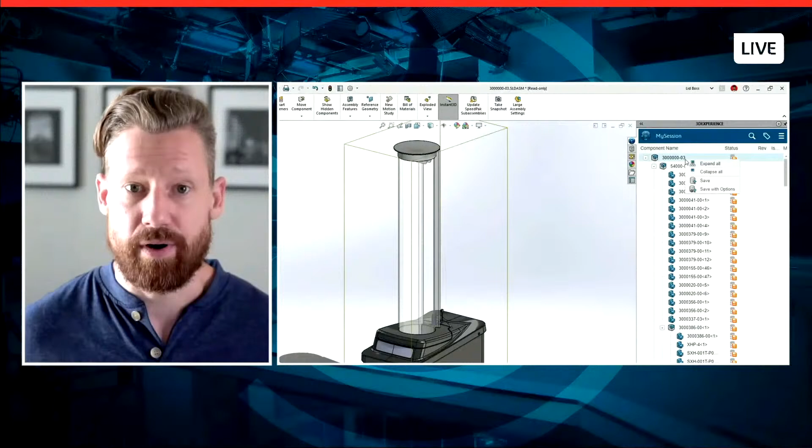And as you've already seen this week, and probably know yourself, that's what Titans of CNC is all about too. That's really the foundation of what makes our partnership so special. A shared desire to innovate and push the boundaries through our respective capabilities, which inevitably empower our communities.

So we kicked off this Titan Trifecta streaming series two days ago with Manufacturing Live, where we got to hear from Barry, Jesse, Trevor, and Travis with our own John Milbury. They explored a wide variety of manufacturing topics for the future, which stemmed from their own personal insights.

And then, of course, yesterday, Barry and I hung out as we explored his tried and true methods for making aerospace parts inside of Solidworks, sharing tons of personal insights that I hope made, or will make if you watch it later, you feel like the luckiest fly on the wall.

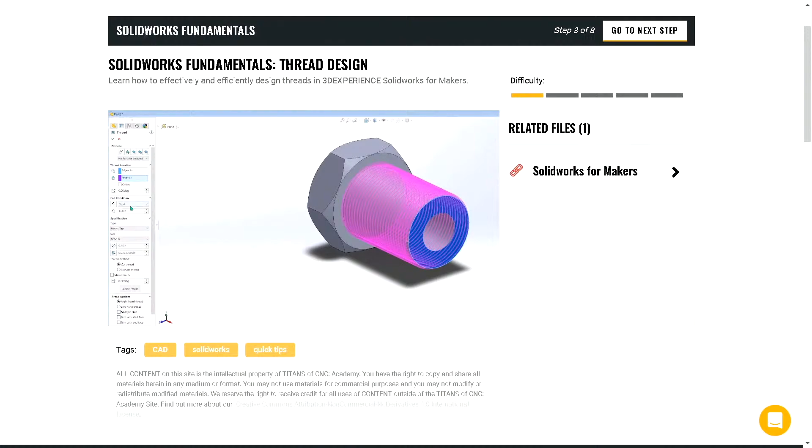So without further ado, let's catch up with the guy that I've gotten to know pretty well over the past few years here at Titans of CNC, Dave Cox, as we explore our partnership and its history in greater detail. Let's get to it.

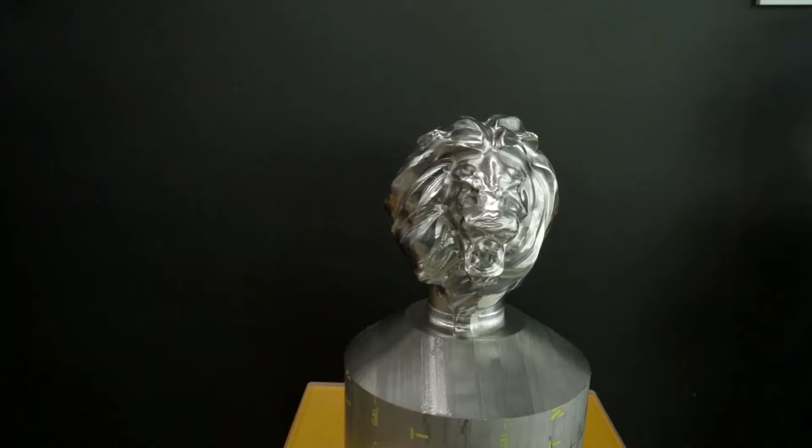So here we are. We're here on Solidworks Live. We are at Titans of CNC, and I'm joined by Dave Cox. Dave, how's it going, man? Doing good, doing good. Good to see you. Happy to have you guys here. It's amazing you get to come to Mecca and see what's going on here.

Yeah, and I've talked to you so many times over the years. It's just cool to meet in person, be here, feel the energy. We've been paying a lot of attention to this lion here.

What's this story all about? So the lion, the chessboard, all of these kind of more artsy pieces that you see - these are ways that we actually use to draw people into the industry. So we're doing projects like this. We call this a part. This is an art part.

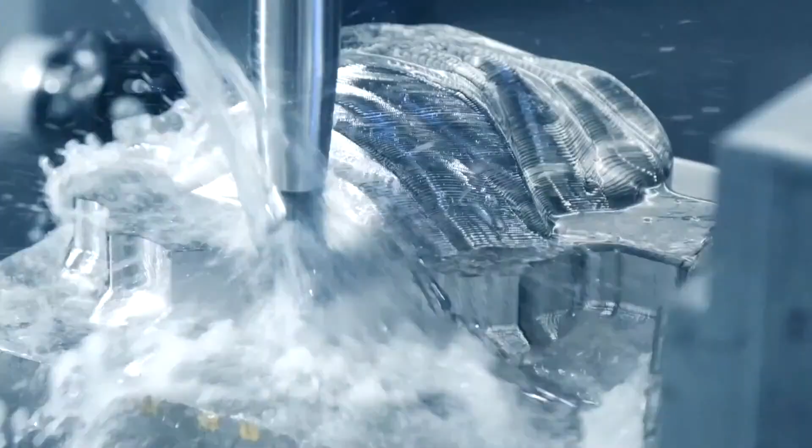Basically, we're showing people that this metal stock turns into this amazing lion head. And by doing that, we're trying to draw people in. We're showing them the breadth of what's capable with this part manufacturing, not even just from a design standpoint, but people don't really understand what goes into this until they see a video that really highlights it.

So how are you gonna first off get it so smooth and get all these different lines going crazy? How are you gonna find a tool that gets back in here behind the teeth without breaking the teeth? That was the first thing I told you before I saw any of the videos online. I'm sure you guys are wondering, like, what is this? That was the first thing I noticed. It was the teeth. It's like, how do you get a tool in there and not chip off the teeth?

Exactly. Especially, you know, in the finishing rounds, right? So you have this really expensive piece of titanium, 6AL-4V titanium, that number one is heavy as heck. So this giant cylinder of it, and the material's super expensive. So by the time you get in here and you're finishing, you could ruin this part very easily just by nicking one of these teeth, by breaking something off.

And so it's really teaching you that mentality of what tools do you choose, what are the feeds and speeds, what kind of chip evacuation do you need to not screw yourself up, and also how do you hold it? Yeah, how do you hold it?

It's important, this thing is heavy. It's insane, it's titanium, and I like how you guys kept it. Yeah, you can see it's titanium here. It's very heavy, I know you can't pick it up at home, but yeah, it's very heavy.

I want to say our fixture on it has over 100,000 pounds of clamping force to hold this, because if you think of it, and you've seen the video, this thing is moving around in real 5-axis space and it's just insane.

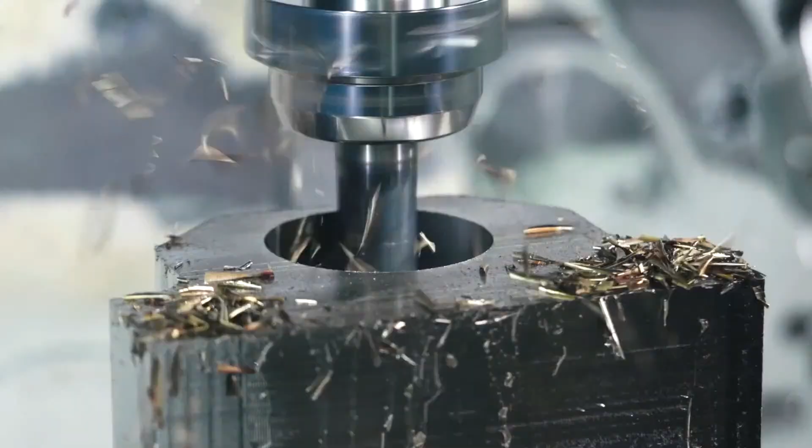That's right. In manufacturing, there are so many personal stories with how people get involved, like we heard from the guys on the panel on the first day. How somebody gets involved in manufacturing plays a lot into how they're going to solve those problems within manufacturing. All they really need is to understand the tools. Once you relate it to baking, once you understand how an oven works, how the pans work, how heat and flour and salt work, all the different pieces, then you just need the recipe, and you can start to get creative with that recipe. So what we're really doing is teaching the fundamentals, and we're also teaching very advanced manufacturing.

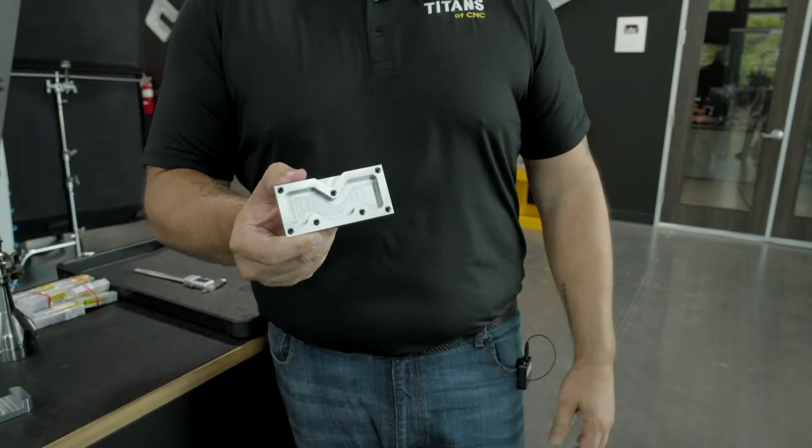So some of our parts, if you want to come in a little tighter, that'd be cool. So teaching people from building block number 1, Titan 1M, right, the famous little part that we have. It teaches people how to make a block, how to do holes, thread, face mill, do pockets, all of that kind of stuff. This is the first piece they're going to create in the Titans of CNC building blocks.

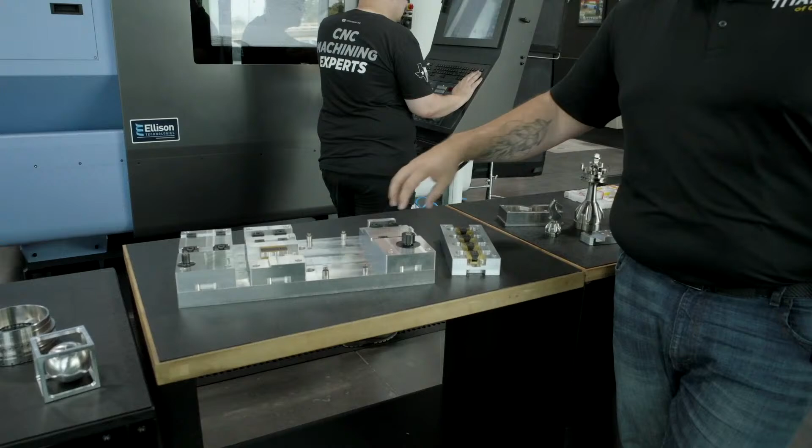Going from this into other elements, learning live tooling on a lathe, learning different lathe work. We talk about how we hold parts and fixturing, and how you set up a piece of work, a fixture plate that can then hold multiple parts so that you can be more productive with what you're creating. All of this is curriculum as well, walking people through exactly how to do it.

So what we look at these academies as is a starting place. The building blocks with 10 parts that you create on a mill, the rocket series with 10 parts that you create on a lathe, and then our fixturing series are kind of the foundation. You look around, being here, you kind of have that fanboy moment, right? It's like, I've watched you guys for years, even before we had ever met.

Seeing your shop here, your big production facility on YouTube and all your different outlets, it's super cool. You see the power of your partnerships, not just us, but Doosan, Kennametal, all the others. We've been partners now, I'm sure a lot of you from the Solidworks community know this, and Titans of CNC community as well. We've been partners now for, it's crazy to believe it, a few years already.

What was it really, if you think way back, what was it really about Solidworks that you were like, I definitely want to partner with those guys? Yeah, it's an easy decision, to be honest. You guys make it super easy, which is great, right? It's Solidworks, a leader in the industry, obviously. One of the easiest to use softwares, the most ubiquitous in part creation, in design.

That's why I fell in love with it before I worked here. Right, exactly. It's the same reason people use Photoshop for creative design, and they use these different signature programs that are there. With Solidworks too, it's what the industry is using. That's where we want to be teaching. We don't want to come from the far side and say, hey, here's something you've never heard of that you should probably start thinking about. We want to go, hey, these are the leaders in the industry. You can get a job literally anywhere. If you understand Solidworks, if you know it, you're immediately employable across the country, across the globe, making more than 30 bucks an hour, like to start. You understand it, you're really good to go.

So Solidworks, number one, super easy to use, excellent interface, all those things. And that's kind of been the ethos of the entire company. That's why all of our partners exist. We have to believe in the product. We have to believe in what you guys are doing. And honestly, it's the people behind the product as well.

Throughout this experience and our other chats, seeing your passion for the industry and seeing your passion for design and what Solidworks is doing, and honestly how much you guys love Barry and feed into him. The dude's a monster when it comes to design, right? Oh my God, it's really cool to get into a room, and I think other people in manufacturing and design, anytime you're in that niche and you have a passion for it, meeting other people that share that passion, you immediately hit it off.

And you can really tell. You can tell when somebody is being real, not just talking about it. There's a palpable energy, especially when someone gets on camera. You can really tell. So you guys know that full well, right?

Oh, absolutely, yeah. And if somebody's BSing us, or if they're just like, hey, I'm not really into it, my heart's not in it, and that can be from our community, it can be when we are hiring people, or honestly when we're sussing out partners and we're trying to figure out who we're going to partner with. It really does play into who are their executives. Who are the people that we're going to be working with on a daily basis? Who is leading them? Who's leading the company? What do they really believe? Does it match with Titan's desire to really change the industry and push things forward? Or are they happy just playing defense and not trying to move forward? We don't like those types of folks.

So I mentioned on live design yesterday, I teased it out, I said I would tell the story. A few years ago, we were getting ready for 3D Experience World, which was like our big yearly conference, right? And Suchit Jain, I was on his team, he's a VP here at Solidworks, and he messaged me. He said, hey, Titan Gilroy's reached out. And I was like, it was one of those moments, you know, we're all busy with work projects, but you look down and you're like, wait, I gotta stop what I'm doing. Like, this isn't the Titan Gilroy, right?

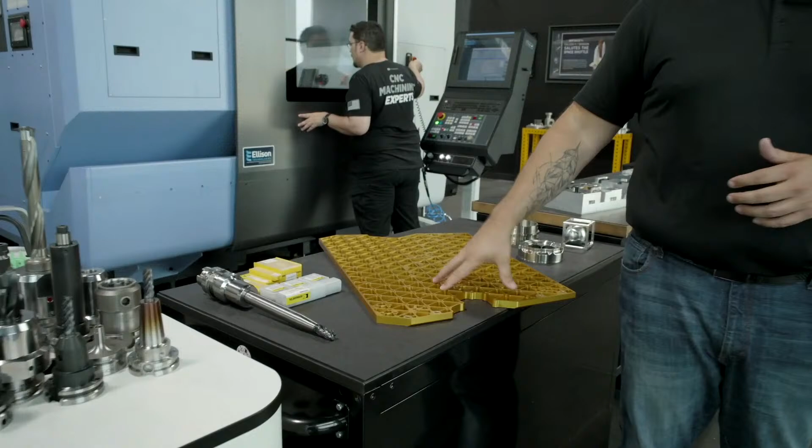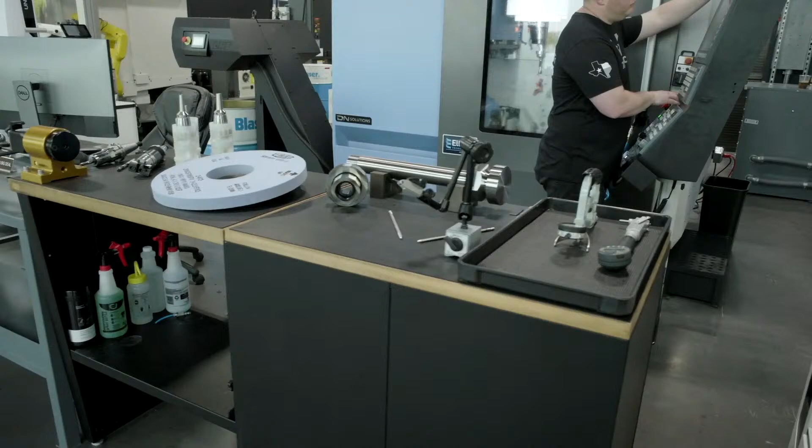Honestly, in the academies, like I showed you with the Classic Academy, this is our 5-axis aerospace academy that we have, talking about tooling and everything else. All these different elements exist to show you the breadth of manufacturing and really to bring you in at whatever level you're at. And so in each academy, we talk through SolidWorks.

We're giving legitimate instruction. Barry is there with his voiceover, and he's sharing his screen. He's telling you exactly what to click on. So if you're coming from little to no knowledge in SolidWorks, all the way up through very advanced elements and stuff he was talking about with knitting that I don't even understand - I don't understand that world at all. I'm proud of you guys who do.

But that's exactly what you were saying earlier, right? That's the stuff that, you know, we've all been using Zoom forever now, and that's the stuff you don't get - you don't get that energy. But when you're in person, you're looking at the same part.

Yeah, totally, exactly. So you get Barry's instruction on all these academies, and the cool thing is, I've never worked for a company like Titans of CNC before. I've been in advertising my whole life, and everybody in advertising wants to charge you something - everything costs money, there's no such thing as a free lunch. But when I came here, Titans focus on everything being completely free - all the education, this world-class stuff, access to Barry, access to Jesse and Tyson and our other machinists, and even Travis, who does GD&T and all the measurement stuff. It's incredible that you get access to this brain trust for completely free, 100% self-directed, at your own pace.

It really is a digital apprenticeship. In the apprenticeship world, you look at what they're doing in Europe - Germany, Switzerland, those kind of places - and they're known for having the world's best apprenticeships. But the way that they teach, they're great at the structure of it, but it still takes 2 to 5 years. What we're doing is a digital apprenticeship - it's at your own pace. You can go as fast or as slow through it as you want. So if you're already employed, you can literally just learn on your own schedule, and then increase your skills, increase your marketability, the money you can make, the food you can provide to your family, all that kind of stuff.

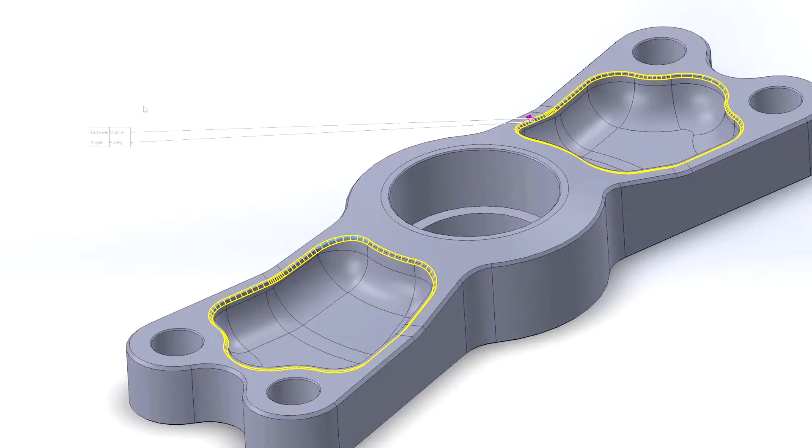When people ask me, Barry, how do I take my career as a CNC programmer to the next level, I always tell them there's a lot of peripheral things they can do that can make them stand out from their peers. One of those is 3D CAD and design. As a CNC programmer, we're constantly creating models of fixturing, and constantly modifying models sent to us by engineering teams. So as far as I'm concerned, CAD is the foundation upon which CNC programmers are built.

If you go onto our Academy and look at a learning series, say the Building Blocks, you look at the Titan 1M, the very first thing you see is design the Titan 1M in SolidWorks. You have somebody who's a master at SolidWorks teaching you step by step how to design that part. They do that for every single part in all of our series, in the Aerospace Academy, the Rocket series, the Building Blocks. So SolidWorks really plays a pivotal role in that.

Absolutely, and you guys make all this content in-house, but at the beginning of our partnership I used to be the guy you'd email saying, hey, we have these new videos for review, just make sure the branding and everything was the way it's supposed to be. It's typical video stuff. And I was super excited whenever it'd be you or Russell or Billy, just be like, oh, I cannot wait to watch these. It never gets old, right?

Like we were saying yesterday, when you really have a passion for something, when you really love something, and I think we both share a passion for design and for SolidWorks, yeah, it never gets old.

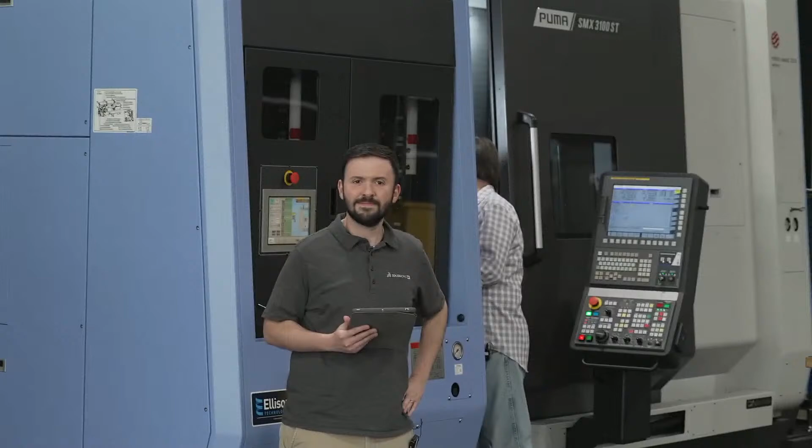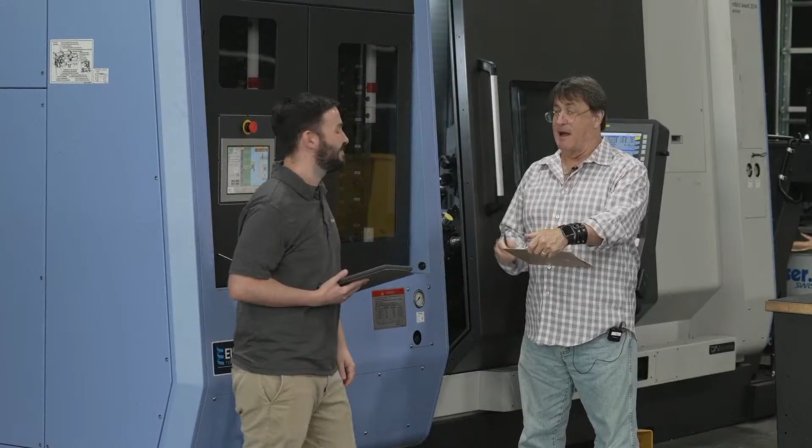Hey John, is now an okay time? Sean, yes of course, how are you doing, man? Good to see you. It's so funny, you know, even though we work on the same team together, I'd never met you in person until this week. Well, it's my privilege really to meet you, and to meet a lot of the people out here that we've had a lot of fun with during the week. It's been a blast.

Barry pretty much said it the first day on Manufacturing Live - just walking around here, you know, Titans of CNC, their team moved here from California just a couple years ago, but you just see the crazy range of capabilities. It really is, like you said, a Disneyland for machinists. That was a really great quote from the other day. It is a Disneyland for machinists, and you're looking at some of the greatest technology. This machine alone is a 9-axis machine with multiple spindles - it's insane, there's not much it can't do. It's not every day you see a machine like this, this crazy range of production capabilities, in terms of media, in terms of making parts - it's just unbelievable.

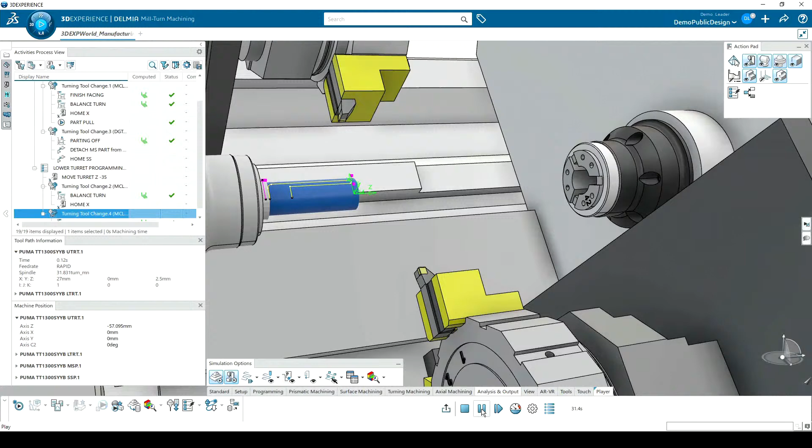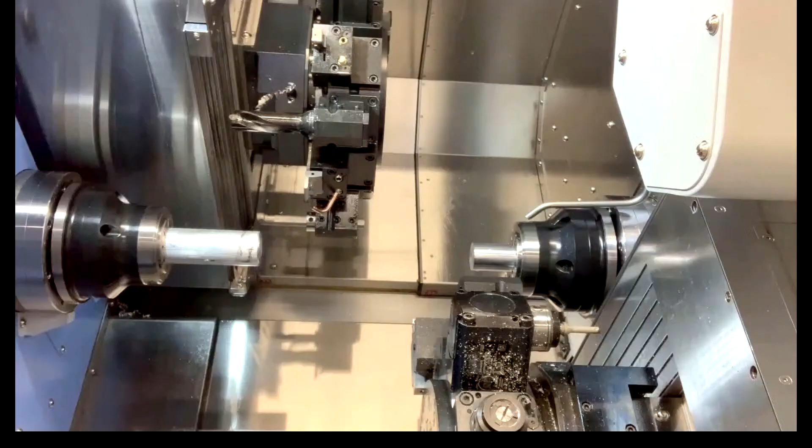Let's go back to 1981, when Dassault Aviation spun off a company called Dassault Systemes, which is what you see today. Basically this PLM company that specializes in CAD as well as CAM, and a lot of other technologies as we get into Geovia and Biovia and some of the others.

But our machining algorithms are over 40 years old. And we've been machining those, and they've been used at companies like Boeing and in the aerospace industry and the automobile industry, for decades and decades. In fact, everything is -- we don't license anything external. We go ahead and R&D all of our own internal algorithms.

And the only thing that we did was in 1998, we acquired Matra Datavision. And the reason that we did that was because they had an incredible capability to do 3-axis machining for mold and die making. And it was just so advanced that we purchased that technology and we basically wove it into our R&D and our code.

Awesome. Well John, it was great to catch up with you. I'm sorry I took your head out of the machine. That's all right, man, we're getting ready for a setup. Hope it wasn't too disruptive for you.

Not at all, my pleasure. Yeah man, we're talking all about these different acronyms here. We teased this a little bit at the beginning of the episode, but we're actually going to announce and show you a little bit of CNC Expert here, which I'm super excited about. I'm sure you, fan of the trades, right? You'll love this. So definitely tune in if you have a chance. Again, keep your head out of the machine. Thank you, Sean. Awesome, thanks John.

That's awesome. Hey, welcome back, Sean. Oh, thanks. All right, we're back, I'm out of breath. This guy, wasn't that far away. What's up man, how's it going dude? How are you? Good to see you again.

So this is a big moment, right? Yeah, we were talking about this, and we mentioned it a little bit earlier. I saw a little bit of a preview when we had our little Zoom meeting on it. But yeah, CNC Expert, tell us again, just tell us a little bit about it. Yeah, so CNC Expert, once again, it's a new platform we're coming out with.

Okay, so Titans of CNC is releasing this brand new platform, cncexpert.com. Not released yet, you can go right now to the site and you can actually sign up to get notified when we do go live with it. You'll be one of the first to get your user profile, that kind of thing. But really, what CNC Expert is, it's the brainchild of Titan. It is literally his looking at the industry and saying, the way that we hire people is broken.

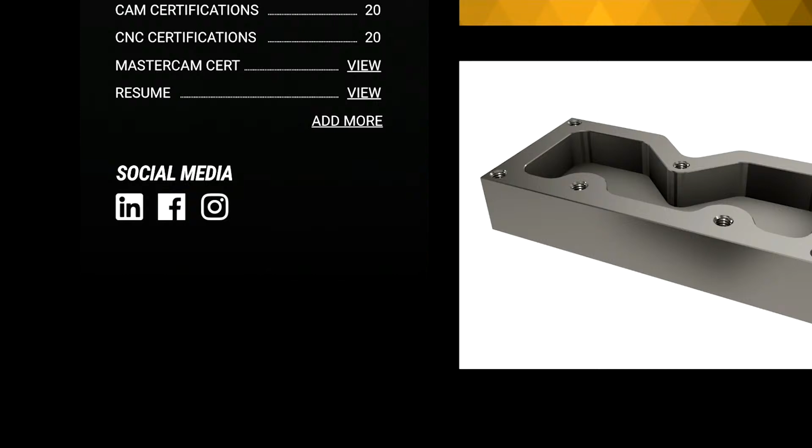The days of somebody sliding a resume across the table and you reading off their list of accomplishments, and you see a bullet point that says 'manages difficult work holdings' - okay, you know everything you need to know, right? Oh perfect, you're hired on the spot, let me give you all the money in the world. What it doesn't actually show you is what work holdings, what have they shown?

So what we want to do is create a place online where somebody can really encompass their entire digital existence for their career, right? LinkedIn doesn't do it.

LinkedIn is not great - I mean, we love LinkedIn, don't get me wrong - but it's not great at showcasing what you're capable of. It's great at having a list of jobs and interacting with folks, but it doesn't necessarily give you a place to showcase those. There are profile sites or portfolio sites where you can show images of what you've done, but you're also not getting the business side of things and the connection. Facebook is great for your personal stuff, but it's also not giving you that kind of business interaction. So what CNC Expert is, it's a place where all of those things come together, and again, 100% free.

That's insane. We've talked about how at the beginning it's a place that's better than any resume, right? You talked about the bullet point idea - it's not going to really tell you very much if you're hiring, but furthermore, if you're the person applying, how confident can you be that you're translating to that person who doesn't know you, what you can do and what your skills are? So that's how you describe it - it's better than any resume for machinists, for engineers. That's kind of the big picture.

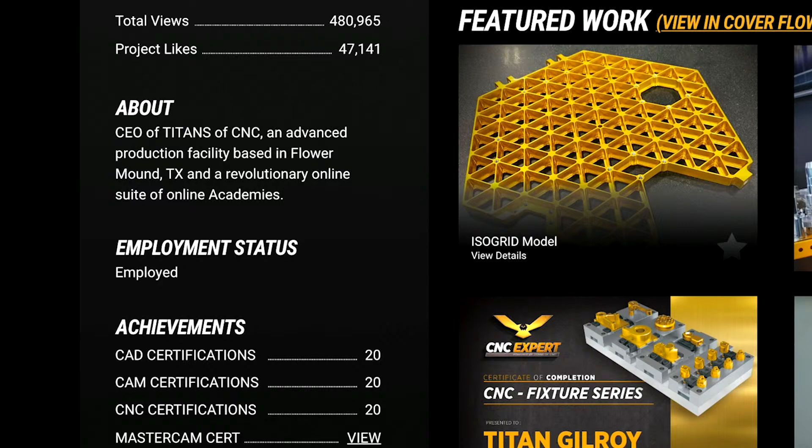This is Titan's own profile page, so you get to see exactly what goes into one of these. You're seeing his profile picture, some personal projects, and you get to see all of the certificates he's achieved through the CNC Expert platform, which is a huge part of this - the certificates. At the bottom of that screen you get to see all of those.

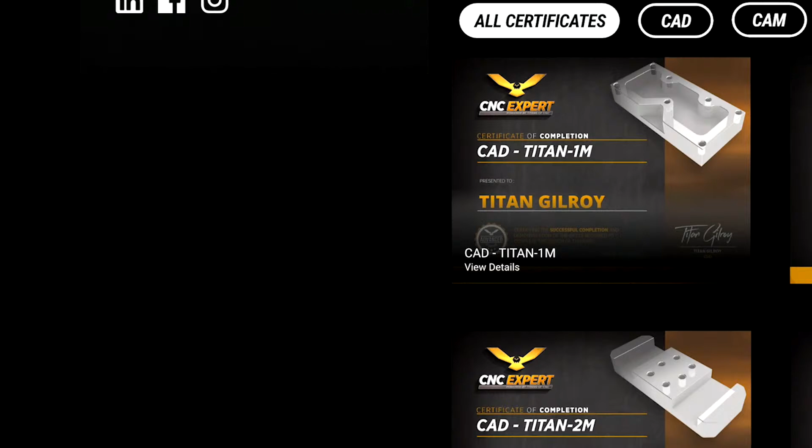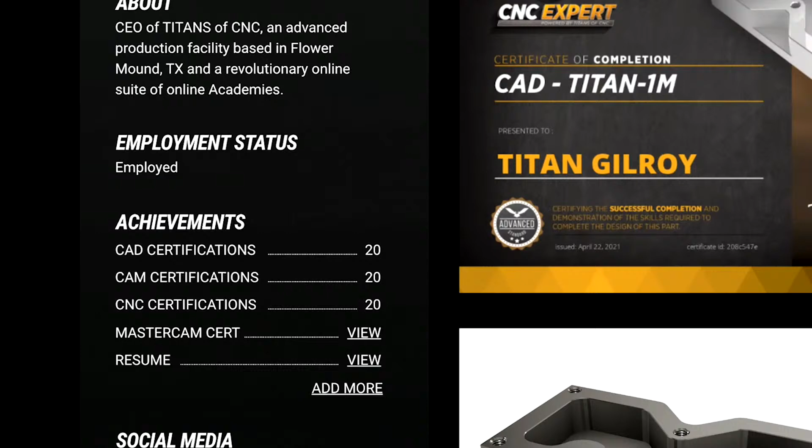That's pretty legit. Next thing I'm going to show you, and we're going through this kind of fast, is a personal project. This personal project page goes kind of beyond that certificate - this is where you get to showcase the work that you've done. We obviously have IP sensitivities and that kind of stuff, you can't show everything, but on the parts you can show, this is where you really get to showcase your abilities. You throw the picture of the part, some specs about it, and then when you scroll down on that page, people can interact, they can make comments, and you guys can have a conversation about what that part is.

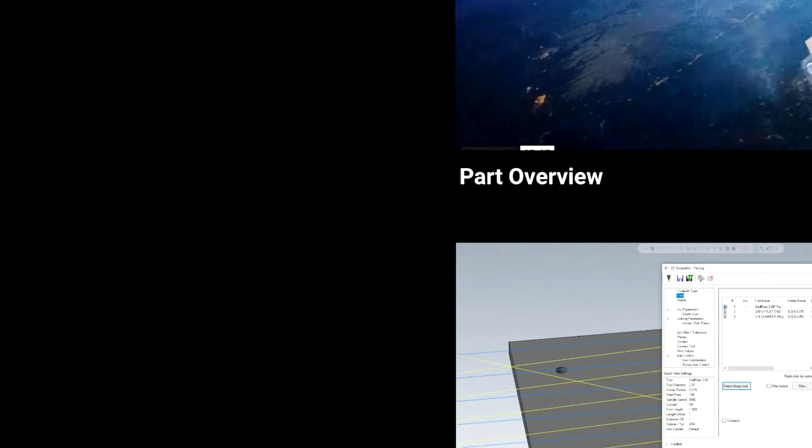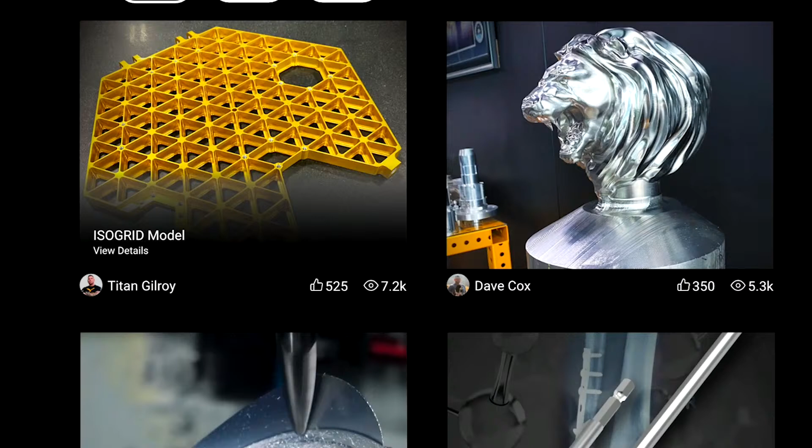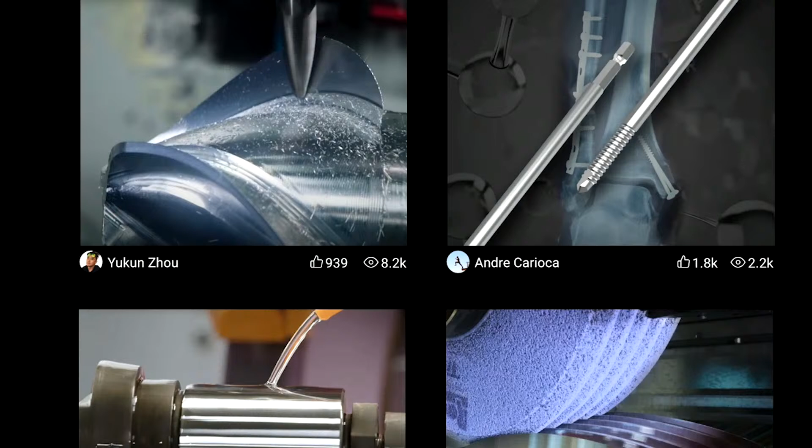And then the really cool part is when you get to the Discover page. The Discover page is really our social hub. This is where you're going to see a global feed of real life makers, manufacturers, designers, programmers, and what kind of projects they're coming up with in the moment. That feed auto-populates, so every time you refresh the page, you're going to get something new, and you can go into those projects, see the specs, interact with people, get your likes, get your views, and rise through the ranks. There's some fun interaction that happens there. So that's my preview for you guys.

Yeah, crazy, just crazy. And you mentioned you can go to cncexpert.com right now and sign up for alerts. Exactly. Yeah, super cool stuff.

We mentioned it a little bit earlier, but it's just that idea, that type of idea where it's like, how does this not exist already? It's 2022, but you realize being here, talking to you guys, the fact we've talked about the Academy a lot during this episode, all of your partners, the power of those partnerships, how you're not only able to bring this service to bear, but also, let's be really clear about it, it's free.

And that's what we're doing with CNC Expert, is we're saying LinkedIn alone is not enough. Portfolio sites are not enough. The certifications that exist in the industry, with some of the folks that do them, they're not enough. There is not a standard, a true standard for 5-axis machining in our industry, and that's insane. Because you look at other places, you look at China, places that we're competing with on a global scale, and they have a government mandate to push manufacturing. We don't have that here. So we're really trying to do our best to help bring everybody together, show what's possible.